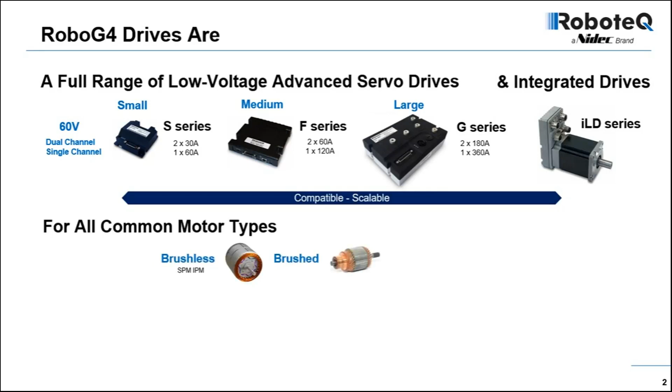The range includes 3 main families of single-channel and dual-channel drives, from small to medium and large. A major new addition are motors with integrated servo drives. All those drives are compatible with each other, and so can scale with the application. The drives support all common motor types, SPM or IPM brushless motors, DC brushed motors, and AC induction motors. RoboteQ drives offer, among other things, world-class performance, functional safety, and superb connectivity.

RoboteQ drives have feature sets that make them particularly well-suited in a wide range of motion control applications. Mobile robots for material handling and warehouse automation are applications where RoboteQ's dual-channel drives, battery operation, STO, and paired motor and drives are key requirements. Agricultural robots share many of the same needs, in addition to stronger resistance to shock and vibration and the need to operate at wider voltage ranges.

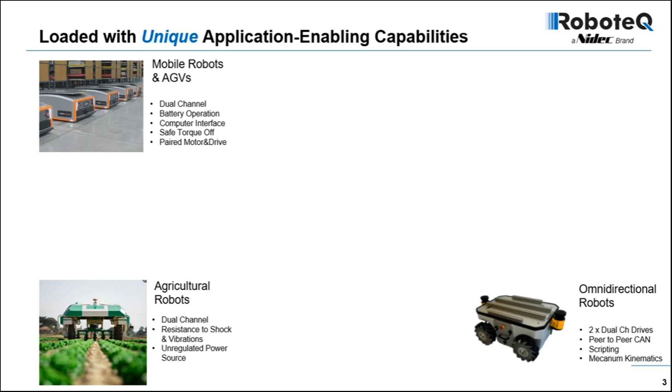The peer-to-peer communication and the scripting capabilities of our drives make it possible to implement complex kinematics algorithms like those needed in omnidirectional robots. Personal mobility is another major application enabled by our drive's very efficient support for interior permanent magnet motors, AC induction motors, and regenerative braking. As watercrafts are increasingly going electric, our drive's sensorless sinusoidal commutation ensures quiet and efficient operation.

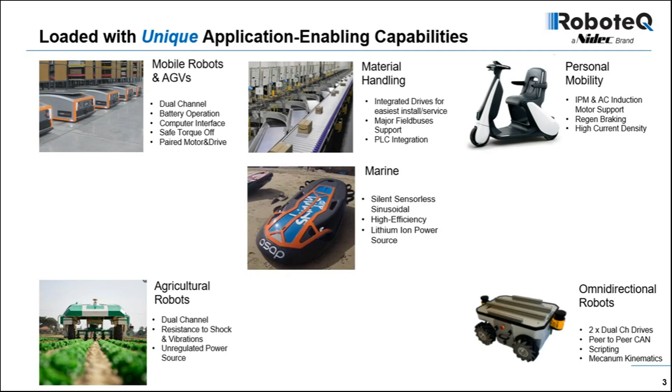One of the major improvements in Generation 4 drives is the support for the Profinet and Ethernet IP industrial field buses. RoboteQ drives and integrated motor drives can now be inserted in large PLC-based factory installations. Likewise, the addition of the EtherCAT field bus on our drives opens the door to multi-axis robotic applications that depend on very tight and precise motor synchronization and advanced control algorithms.

Precise positioning, multi-turn encoders, advanced algorithms, and Ethernet are also defining requirements in many test and production machines. Finally, our new drives and integrated motors are an excellent fit in the emerging field of medical robotics, thanks to their high precision, low emissions, and high reliability.

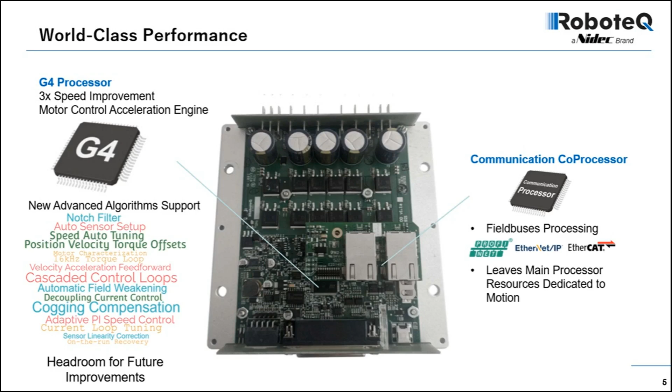Another important development is the support of the EtherCAT, Profinet, and Ethernet IP field buses. These industry-standard protocols are handled by a dedicated communication coprocessor, leaving the main processor free to focus on motor control tasks and thus improving total system performance.

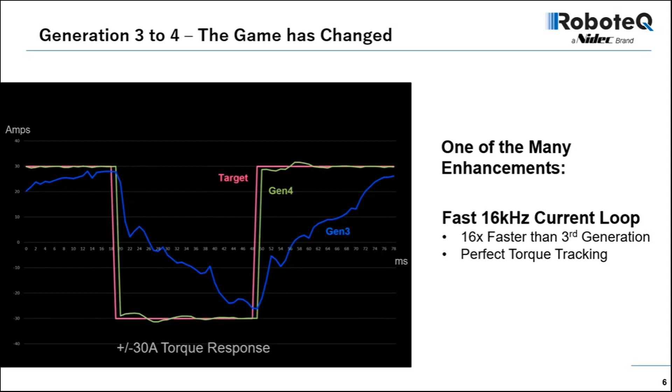Here we see a practical example of how the faster processor dramatically improves performance compared to a third-generation drive. The purple line shows a command requesting an instant torque change from plus 30 amps to minus 30 amps, and 30 milliseconds later back to plus 30 amps. The third-generation drive with its 1 millisecond control loop performs imperfectly at that speed. The control loop now runs 16 times faster in RoboG4 drives. The output current tracks the command with minimal delay and practically no overshoot.

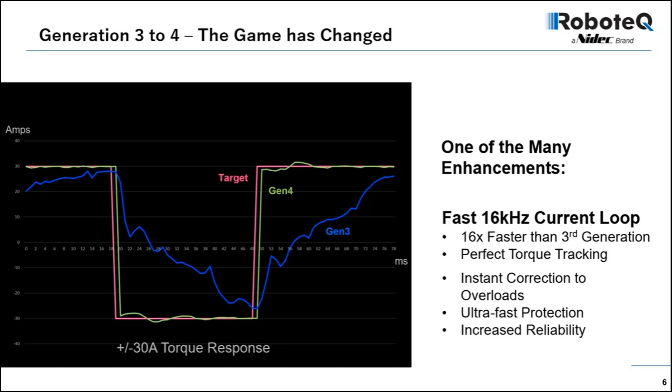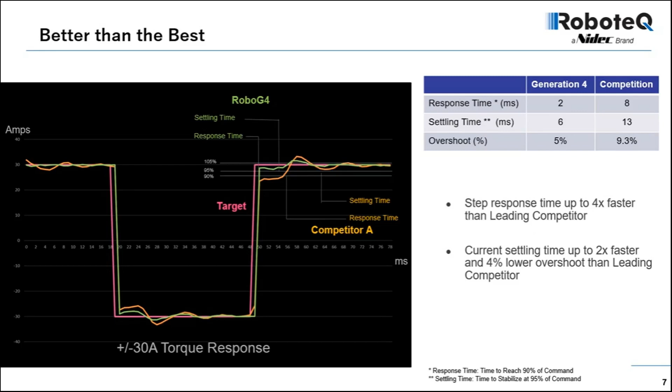When a steady command is applied, the fast loop also instantly corrects the current in case of sudden load changes. The current always remains within safe ranges, resulting in fast protection and increased reliability. The control loop now runs 16 times faster in RoboG4 drives. Step response was 4 times faster and settling time twice as fast with 4% lower overshoot.

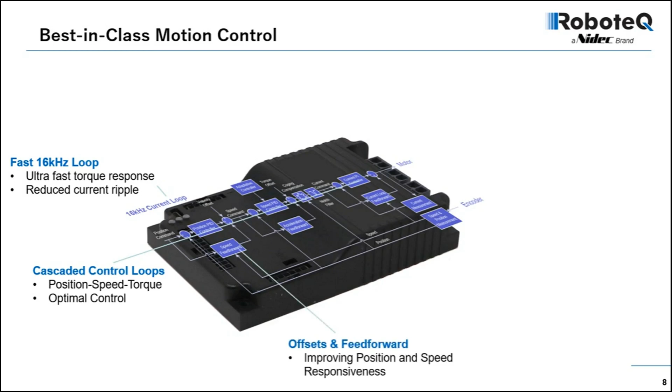Here we see the details of the new control loop architecture and some of its other important enhancements. In addition to the fast current loop we just discussed, control is now composed of 3 cascaded loops for position, speed, and current, each with its own PID gains, resulting in easier tuning and optimal performance. Offsets and feed-forward blocks have been added to improve system responsiveness. A notch filter has been added to tune out vibration at the system's mechanical resonance frequency.

A mechanism has been added to compensate for the magnetic cogging caused by the rotor teeth and the permanent magnets inside the motor and smooth out the rotation at very slow speeds. Current loop feed-forward uses the motor model to instantly compute and apply the output needed to reach the desired torque. This increases the system's responsiveness and further reduces overshoots compared to the PID loop alone.

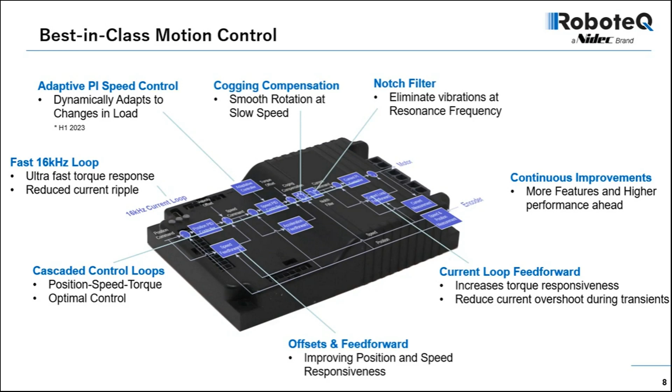Robots typically operate over a wide range of load that can change on the run. Adaptive control continuously observes the system's inertia and applies new gains on the fly, resulting in optimal performance at any load point. Our scientists are continually working on new and improved algorithms, maintaining our drives at the leading edge of motion control technology. Another exciting new feature is automatic field weakening. Here is a typical electric motor torque speed curve.

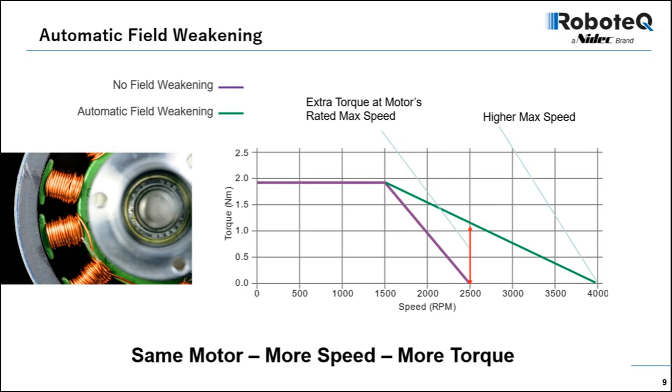With field weakening, the motor can reach a significantly higher maximum speed. It also produces additional torque at the motor's rated top speed. This is entirely and automatically managed by the drive, essentially extracting more performance from the same motor at no added cost or effort. Precise rotor sensors are essential for proper sinusoidal commutation.

Some sensors are not perfectly linear, and any such imperfection directly translates into imperfect current, and therefore inefficient motor operation. RoboteQ drives can store a linearization table to correct these imperfections. With the correct rotor angle reporting, the current is now perfectly sinusoidal, resulting in smooth and efficient motor rotation.

New automatic setup and tuning features have been added to save precious effort and time. The rotor sensor is a key component of the system, as we just saw. In less than a minute, the new sensor setup function automatically determines the sensor mechanical offset, its linearity, and polarity. The data is then stored in the drive's configuration memory. The motor is typically ready to run immediately and efficiently after this step.

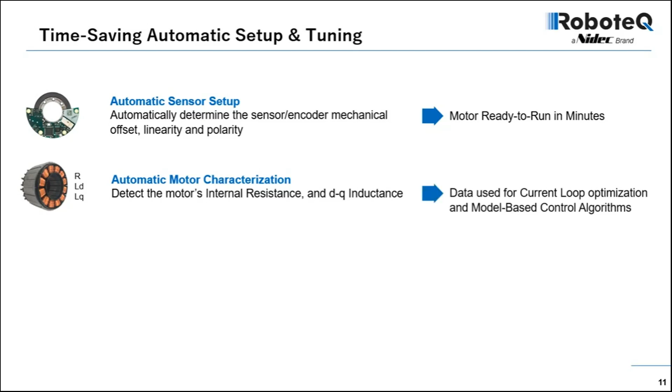The motor's internal resistance and DQ inductances can be automatically measured by the drive. This information is often missing from the motor manufacturer's specs. It is, however, essential for tuning the control loops and for the implementation of model-based algorithms.

The current loop can be tuned in a matter of minutes as well. For a desired torque bandwidth, the drive and PC utility automatically determine and store the loop's correct PI gains. After this step, the output current will follow torque commands with minimal delay and no overshoot.

An automatic process is also provided for measuring the inertia and friction of the system. With this data, the drive then computes and applies the speed loop's PI gains for a desired response bandwidth. Speed loop tuning is more accurate and performed significantly faster than before.

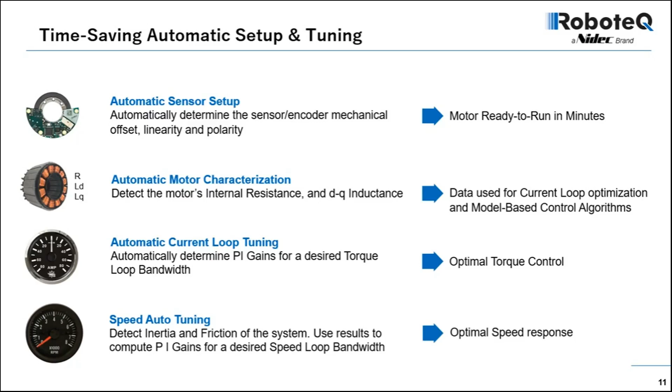Enabled by their higher computing power, the drives now support several kinds of special AC motors. Thanks to their lower cost and high-speed range, internal permanent magnet or IPM motors, now widely used in electric vehicles, are growing in popularity in many other applications.

IPM motors require that the torque and field currents, IQ and ID, are regulated optimally depending on the motor's actual speed and torque demand. The drive performs this algorithm using the motor resistance and inductance that were measured during the auto-characterization process, making IPM motors as simple to drive as traditional brushless motors.

Significant savings can be achieved by eliminating the rotor sensor altogether, especially in applications with motors driving propellers, such as watercrafts, drones, or fans. In these sensorless applications, the drive can estimate the rotor's angular position, considering the motor's theoretical model and the actual measured current. The result is silent motor operation, with very efficient field-oriented control.

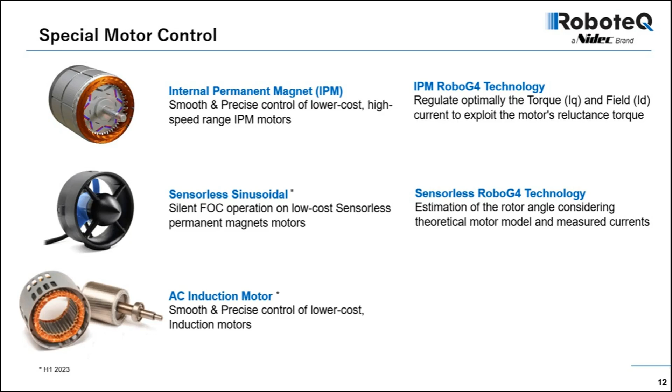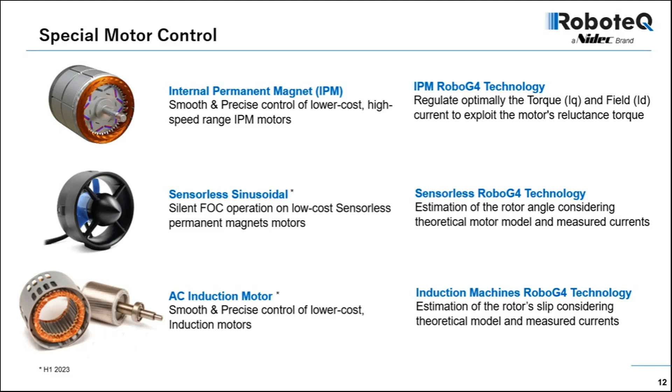AC induction motors, with their simpler construction and lower cost, are an attractive choice in transportation and some robotic applications. Using the automatically measured motor characteristics, the drive runs a model-based algorithm to estimate the rotor's slip and control the motor with great accuracy.

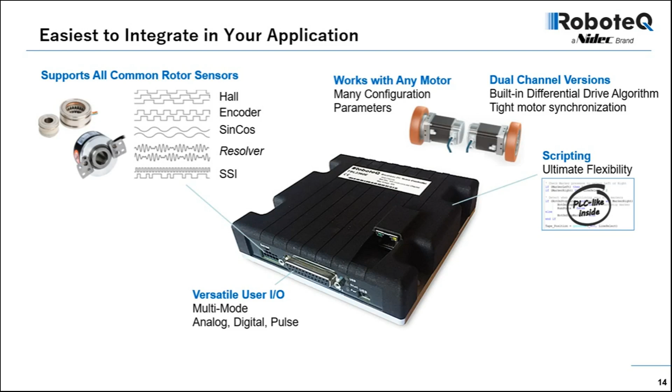All RoboteQ drives have user I/O that can operate in many ways and be used for practically any purpose. Scripting is a unique capability of RoboteQ's drives that enables unprecedented flexibility. We'll be discussing it in more detail in a moment. All drives have built-in PC connectivity via USB or serial. This allows the user to change configuration and monitor the drive in a non-intrusive manner while it is operating.

The drives are backed by extensive documentation. Wiring, connector pinouts, and electrical specs are described in a 10 to 20-page product-specific datasheet for each drive model. All common features, operating modes, and commands are discussed in the drive's reference manual.

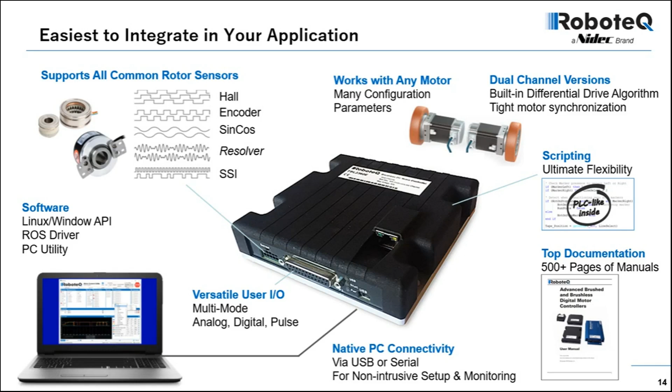Scripting and networking have their own dedicated manuals. RoboteQ offers APIs and drivers to help interface the drive with user applications, or for integrating into systems running the ROS robot operating system. The drives are supported with the free RoboRun PC utility.

The tool has been updated to support the drive's new features. Interactive menus have been added to perform the automatic motor characterization and sensor setup. A new wizard steps the user through the automatic speed and torque loop tuning, cutting the effort from hours to minutes.

To help monitoring and troubleshooting, the utility features a new powerful multi-channel chart recorder capable of viewing any of the drive's parameters with a time resolution of 1 millisecond. This is more than 20 times faster than the earlier version.

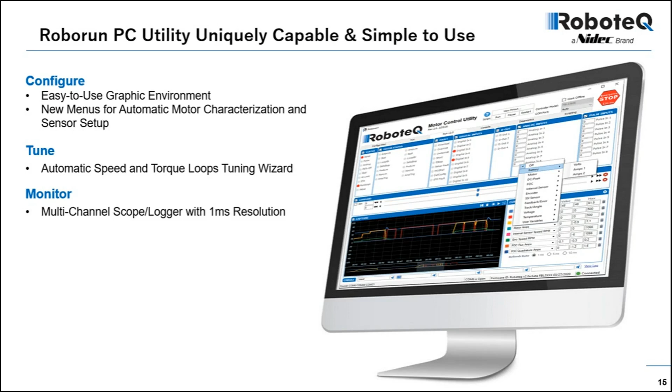The utility incorporates a development environment for writing, simulating, executing, and debugging MicroBasic scripts. Finally, the utility includes the firmware updater necessary to install the latest advances. Firmware can be installed via USB, RS-232, RS-485, and now also via CAN bus.

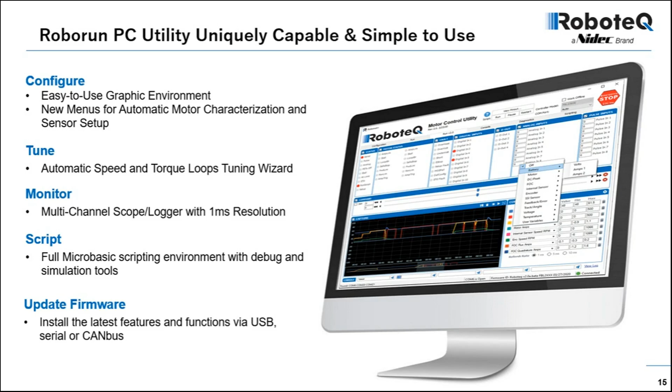Field bus connectivity is another area of major progress in RoboG4 drives. CAN bus is the first field bus supported since RoboteQ's early generation drives. With Generation 4 comes a fully interoperable version of the CANopen DS402 protocol, making the drive a direct plug-and-play product in these installations. RoboteQ drives support 3 additional CAN bus protocols.

RoboCAN is a mesh network allowing any drive to exchange data and commands with any other drive, directly without the need for a central PLC or computer. MiniCAN is a simplified subset of CANopen. RawCAN is a low-level protocol which can be used together with MicroBasic scripting to implement any protocol.

Modbus is a legacy communication protocol. ASCII and RTU Modbus is available on all drives with RS-232 and RS-485 ports. Modbus TCP is supported on all drives with Ethernet connection.

Profinet and EtherNet/IP field buses are now available in some 4th-generation drives. These Ethernet-based buses primarily integrate with PLCs in factory automation applications. Profinet is the main communication bus of Siemens PLCs and is therefore dominant in Europe, while EtherNet/IP is this of Rockwell PLCs and therefore dominant in North America.

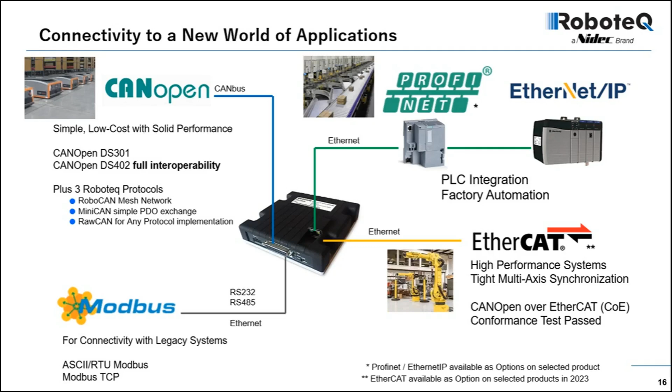EtherCAT is now also available on selected new drive models. EtherCAT is a high-performance field bus with microsecond-level synchronization between nodes. It is a key technology for multi-axis robotic systems and machines. RoboteQ supports CANopen over EtherCAT, mapping the DS402 protocol inside EtherCAT data frames.

One of our drive's most unique and powerful features is the ability to store and execute user programs. This capability is the equivalent of combining the drive functionality and this of a PLC or single-board computer into a single unit. MicroBasic is a simple BASIC-like language that is learned in minutes.

Users of RoboteQ's 3rd-generation drives can easily migrate their application to the new generation drives. All the company's most popular drives have been updated or will soon be. All changes are under the hood, with no change to any physical properties, such as enclosure, dimensions, and mounting, and no changes to the connector types, positions, signals, and pin assignments.

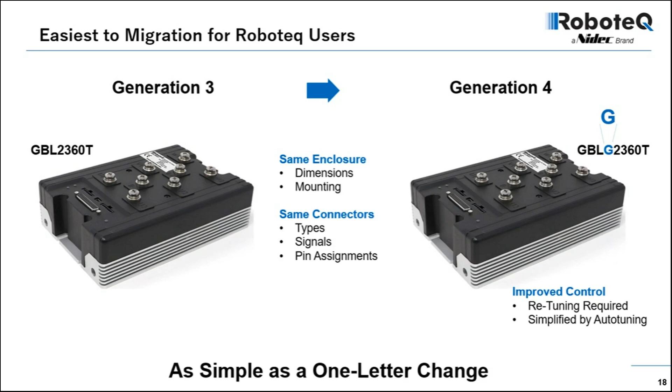The new generation drives differ by the G letter added to the original part number. Because of the significant improvements made to the control loops, the new drives will need to be tuned again. This step is made quicker and easier thanks to the drive's new auto-tuning capabilities.

RoboteQ's RoboG4 drive technology is at the heart of a new line of motors with integrated drives. These space-saving, easy-to-install, and easy-to-service units come pre-configured and tuned to deliver a true plug-and-play experience. They are composed of a long-life precision Nidec motor with integrated magnetic encoder.

The first member of the family is a 60mm frame motor available in 2 power ranges. Integrated motor drives with smaller and larger frame motors are currently under development. Because they are G4-based, they support all the advanced features and algorithms discussed so far in this presentation. The products feature an innovative mechanical design, resulting in a very compact assembly, with efficient cooling and solid environmental performance.

These integrated motors are typically mounted away from other motors with which they need to cooperate, and away from the main computer or PLC that supervises their operation. Connectivity to field buses is therefore essential. Support is available for CANopen, EtherCAT, Profinet, and EtherNet/IP.

All ILD integrated motor drives support Safe Torque Off. They can be made to reliably stop producing torque using a pair of redundant command signals. STO is a critical functional safety requirement in applications where malfunctions can cause harm to persons or property.

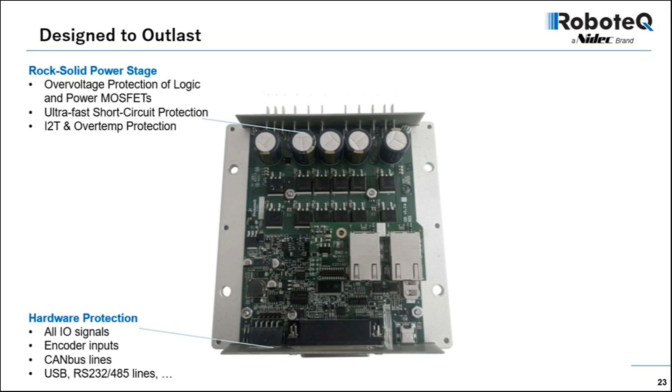Thermal protection also has been improved with the addition of an I²T algorithm, which throttles the maximum allowed current based on a theoretical thermal model of the drive. Additional protection is now present on all connections to the outside world. Extra attention has been given to the communication lines since they typically travel further distances and are therefore more exposed to high voltage potentials. System-level protection looks for and protects against faults in the drive and the components that attach to it. Many such protections have been added to detect faults with sensors, loop following errors, motor stall, and others.

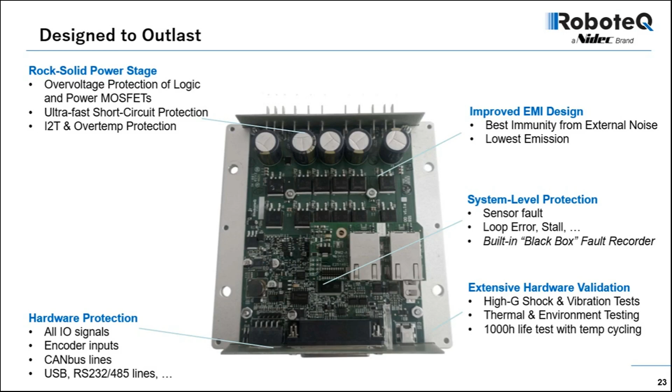Every time a fault occurs, the drive records the voltage, current, and temperature at the time of the event. The log can then be examined offline. This unique feature greatly helps troubleshooting. The new drives have significantly higher immunity to external disturbance, such as common mode noise or electrical noise caused by other drives in the system. EMI emission has also been reduced. Each drive design undergoes rigorous and extensive validation tests, including high G shocks, vibrations, thermal, and environment testing. Drives are then continuously cycled through their full temperature range under load for 40 days.

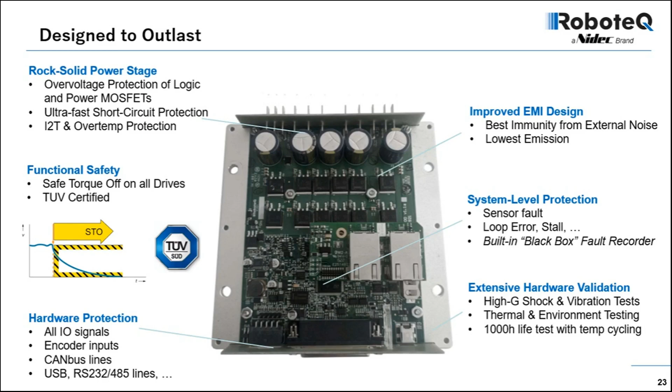All new drives support safe torque off. STO is a critical functional safety requirement in applications where malfunctions can cause harm to persons or property. With STO, the drive can be made to reliably stop producing torque using a pair of redundant command signals. RoboteQ's STO circuit has been evaluated and certified by TUV. It can therefore be trusted to always work, even in the case of a single component failure. While STO is a must-have requirement, it does not cause any braking and is therefore not entirely safe when applied to a moving, heavily loaded robot.

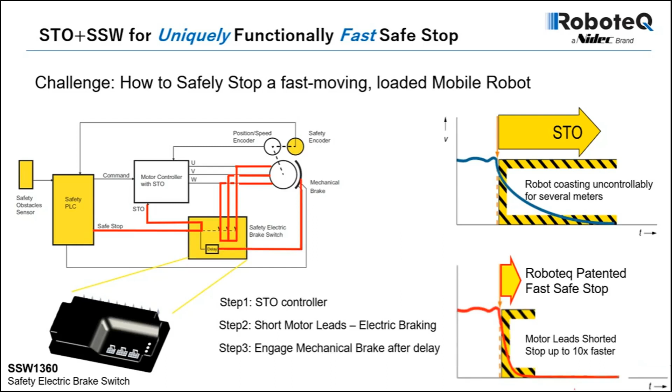With the motors floating and only friction to slow them down, the robot will coast uncontrollably for several meters before stopping. To solve this challenge, RoboteQ has developed a safety electric brake switch that works in pair with the drives. This patented device is connected in parallel with the drive and motor wires. When the safety PLC commands the torque to go off, the switch passes on the STO signals to the drive, which in turn floats the drive's output. The switch then shorts the motor leads using redundant solid-state relays to cause a strong electrical braking and stop the robot up to 10 times faster. After a delay, the mechanical brake is engaged, keeping the robot immobilized.

Let's now see how our drives offer the value that you need to compete.

Sorry. Before we go to the last section of value, we got one additional question, and this is, do you support PWM brake control? Yeah, the answer is yes. It kind of depends on the model of the product. So you can look at the end of the presentation. We have a table, and I think we show which products support it and which do not. But this is a feature that we are increasingly implementing in our products.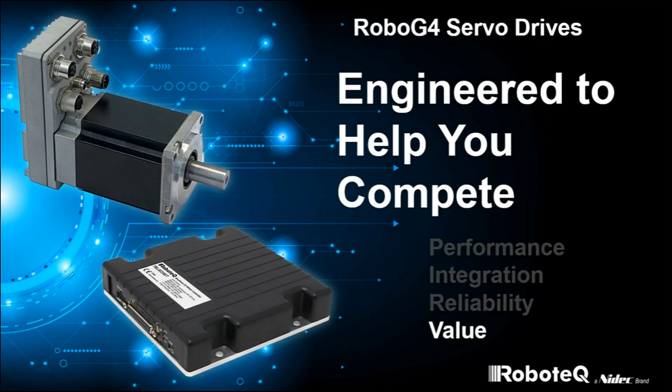When compared to drives with similar performance, features, connectivity, and quality, RoboteQ's drives are the market's most competitive. Lower cost is designed into the product. The drives are true single-board designs, requiring no expensive and cumbersome add-on or breakout board for their use. They are cost-optimized without compromising performance or quality, using common multi-sourced components and connectors. In dual-motor systems, one dual-channel drive always costs less than two single-channel drives. Simplified installation and wiring bring system cost further down.

In the case of integrated motor drives, Nidec is one of the few companies in the world that fabricates both the motor and the drive. The integrated unit therefore costs less than buying the motor, encoder, drive, and cables separately. Further savings are achieved by their lower installation and service costs.

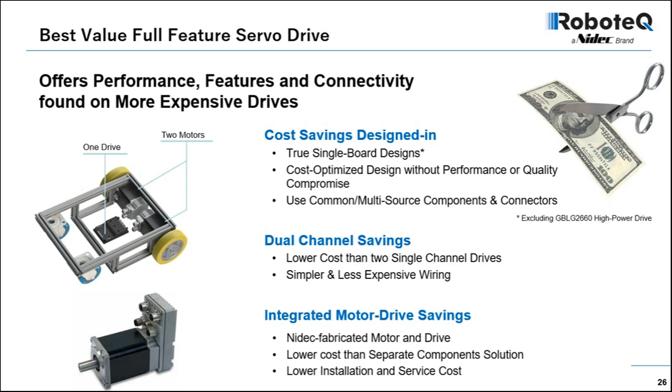With 150,000 employees, $15 billion in sales, and plants all over the world, Nidec is a manufacturing powerhouse. Our global purchasing power ensures that we buy at the best possible price and always get priority treatment from our suppliers in times of component shortages. We manufacture in very high volume at the lowest cost and pass these savings to our customers. We deliver dependably, whether you buy hundreds or tens of thousands of units.

You can depend on Nidec and RoboteQ to be on your side over the long term as well. Our drives are periodically updated and maintained, and thus avoid obsolescence. Today, we have many OEM customers that we supplied without interruptions 10 years after they installed their first RoboteQ drive. This concludes our technology introduction.

Let's now look at the Generation 4 initial product offering. Looking into early 2023, there will be a total of 7 RoboG4 products available: 2 dual-channel and 2 single-channel drives in the S family, 1 dual-channel drive in the F family, 1 dual-channel drive in the high-power G family, and 1 integrated motor drive.

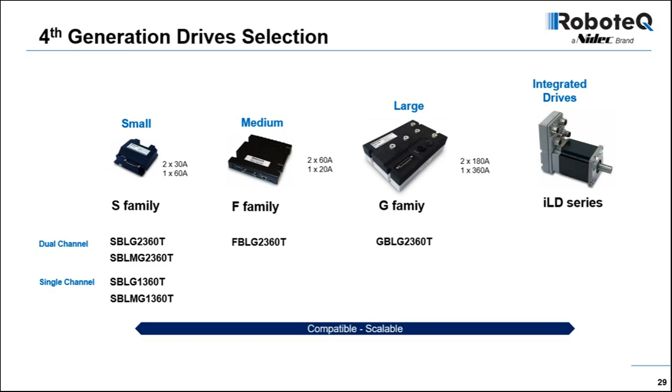Before jumping into the details of each product, here's a recap of how RoboteQ drives are named. The scheme is quite simple and logical. Understanding it makes it possible to guess the main characteristics of any RoboteQ drive. The first letter is the product family, in this case S, F, or G. The next 2 letters determine the motor type, BL for brushless, DC for brushed DC, and IM for induction motors. The next letter is present only on some drives to define a connectors variant. Drives with the letter M in that location use Molex I/O connectors.

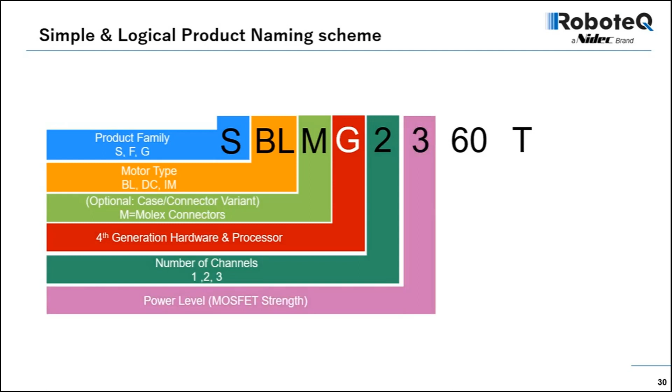The G means it is a 4th generation drive. The first number is the number of channels. The following digit is related to the number of MOSFETs, and therefore to the power level of the drive. The last 2 numbers are the drive's voltage rating. Several digits can then be added to identify optional features like single-channel variants, safe torque off, or field bus type.

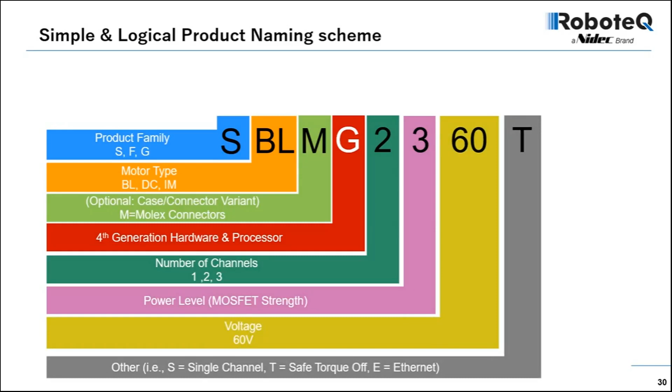The 2 single-channel members of the S family are the SBLG1360 and the SBLMG1360. Both have the same dimensions and similar amperage rating. Both support STO. The SBLG1 is rated 30 amps max and 20 amps continuous. It uses a D-sub connector and screw terminals. It has fewer features and is lower cost.

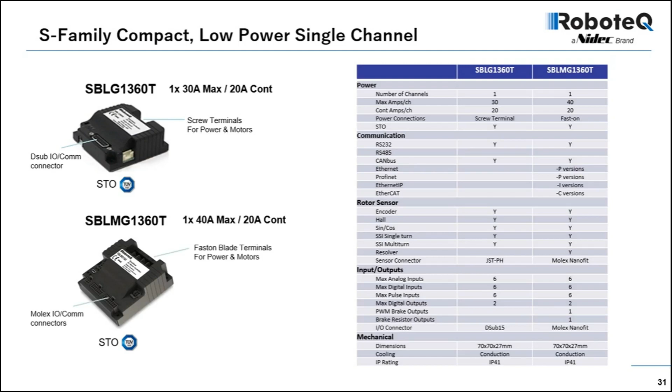The SBLMG1 is rated 40 amps max and 20 amps continuous. It uses Molex I/O connectors and fast-on power terminals. This drive can accommodate modules for connections to Profinet, Ethernet IP, and EtherCAT field buses. The table shows all the drive's features side by side for easy comparison.

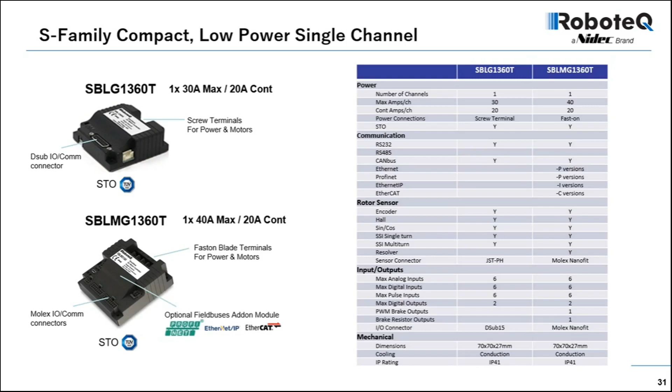The two dual-channel members of the S family are SBLG2360 and SBLMG2360. Both have the same dimensions and are rated 2 times 30 amps max and 2 times 20 amps continuous.

Both support STO. Both can be ordered as single-channel variants with twice the amperage or as 3-channel drives for brushed DC motors. The SBLG2 uses a D-sub connector and screw power terminals. The SBLMG2 uses Molex connectors for I/O and power. The table shows all the drive's features side by side for easy comparison.

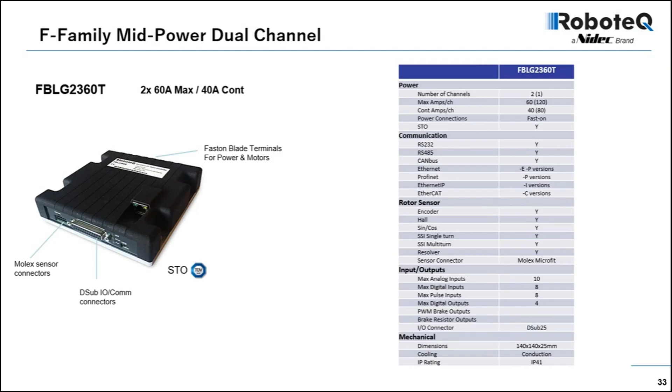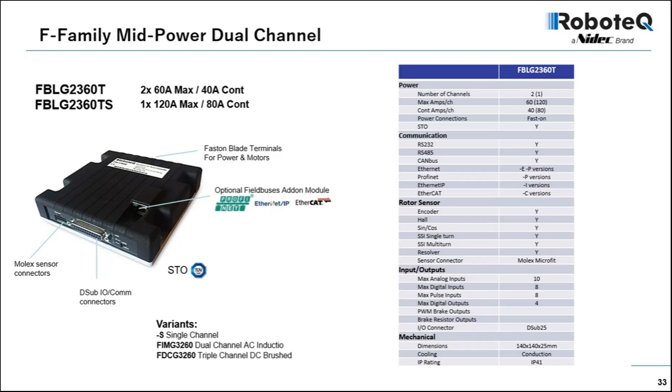The FBLG2360 is the only member of the F family. This dual-channel drive is rated 2 times 60 amps max and 2 times 40 amps continuous. It supports STO. This drive can accommodate optional modules for connection to Profinet, Ethernet IP, and EtherCAT field buses. It can be ordered as a single-channel variant with twice the amperage, as a drive for induction motors, or as a 3-channel drive for brushed DC motors. The table lists all the drive's characteristics.

The GBLG2660 is the only member of the G family and is the highest-powered drive in RoboteQ's catalog. This dual-channel drive is rated 2 times 180 amps max and 2 times 120 amps continuous. It supports STO. The drive uses D-sub connectors for I/O and communication, Molex connectors for sensors, and high-power screw terminals for power supply and motor connections.

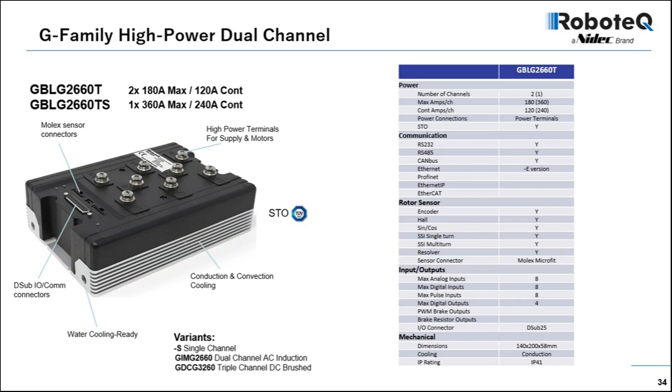The ILD60S is the first of a series of motors with integrated drives that will be introduced starting in 2023. This product can be assembled in several different ways. At the core is a 60mm frame motor with built-in magnetic encoder and a RoboG4 drive. The variants chart shows how a unique product reference can be constructed depending on the desired options.

Motor length, brake or no brake, STO, EtherCAT, Profinet or Ethernet IP field bus, and front or rear-facing connectors are all possible options. Only a selected number of model variants will be kept in inventory for fast delivery. All others will be made to order for large volume users. The table shows the product part number and features list of the motor drive shown on the picture.

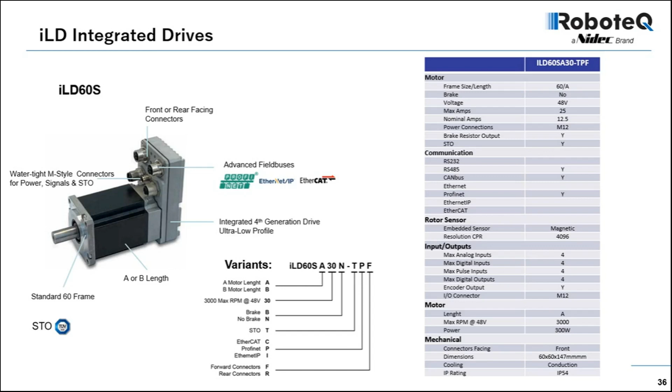On this last slide are shown the 3 AGV kits that we make available to speed robot development. For small robots up to 500 kilos, the AGV060B bundles 2 60mm frame motors with gearboxes and wheels and an SBLG2360 dual-channel drive. For medium-sized robots up to 1,000 kilos, the AGV089A kit includes 2 89mm frame motors with gearboxes and wheels and an FBLG2360 dual-channel drive.

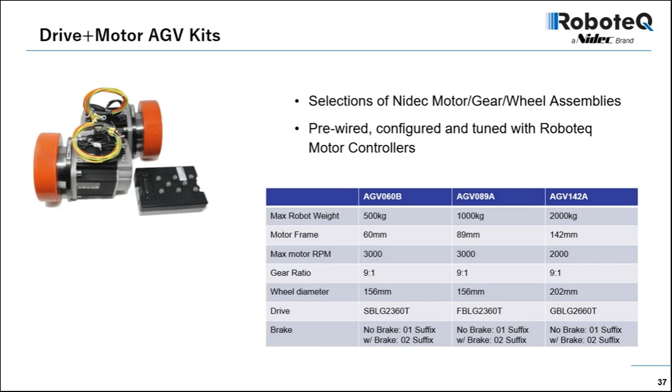For large robots up to 2,000 kilos, the AGV142A packages 2 142mm frame motors with gearboxes and wheels and a high-powered GBLG2660 dual-channel drive. This concludes our presentation.